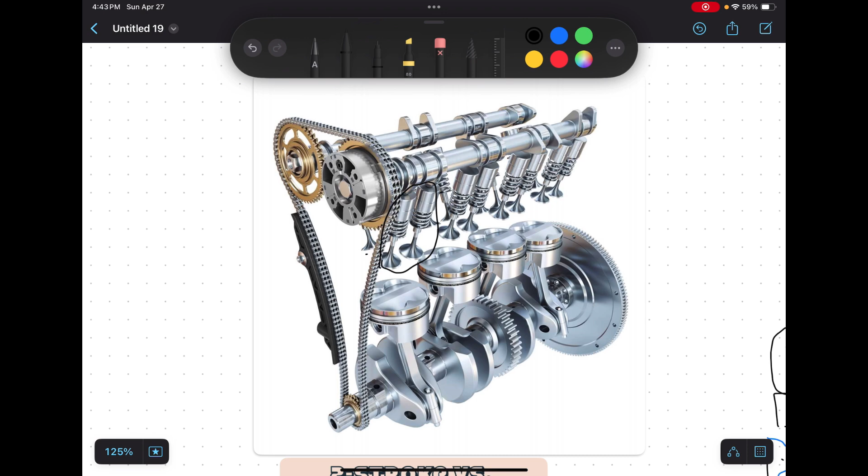So this is going to essentially be the diagram we're working off of. You've got your 4 pistons. You've got your valves. Each piston has 2 exhaust valves and 2 intake valves behind it. You can kind of see them, and you can see them better right there.

Those are the intake valves, and these are the exhaust valves.

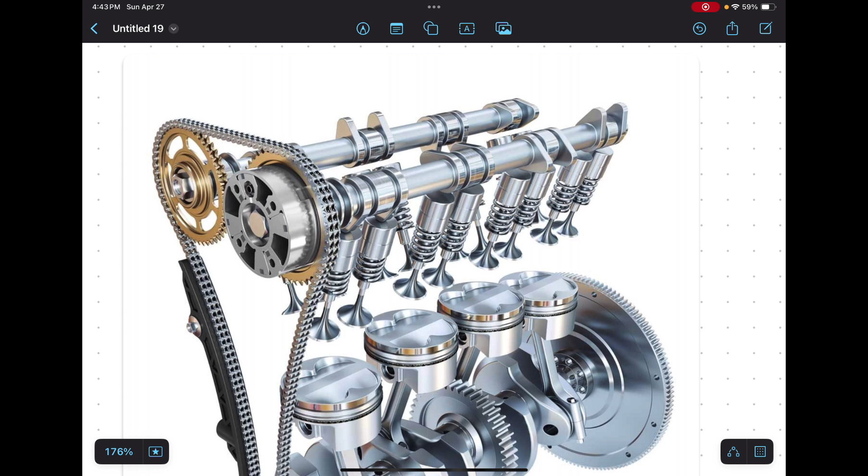Okay, cool. Well, what are camshafts? They're the things right above the valves, these 2 big shafts.

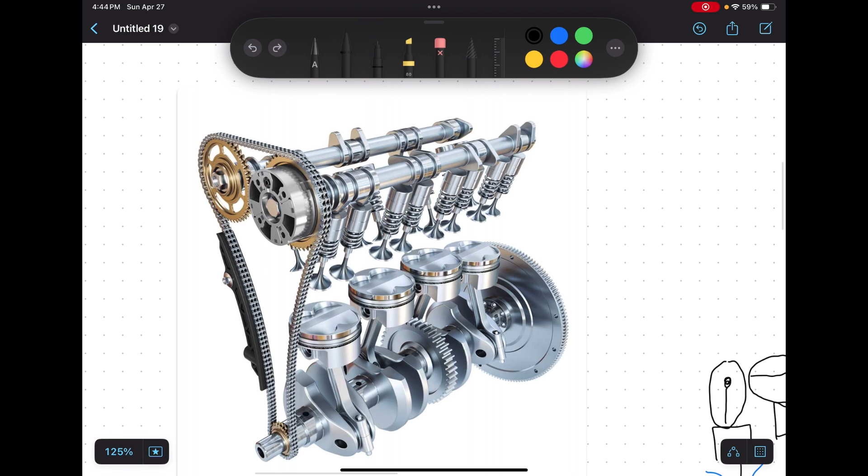So what do they do? Well, the first thing I'm going to talk about: you have your drive shaft down here. It's connected to this small gear, which is connected to these 2 big gears. If you have a small gear connected to a big gear, that means this shaft, the camshaft, is spinning slower than the drive shaft. To be precise, it spins at half the speed of the drive shaft.

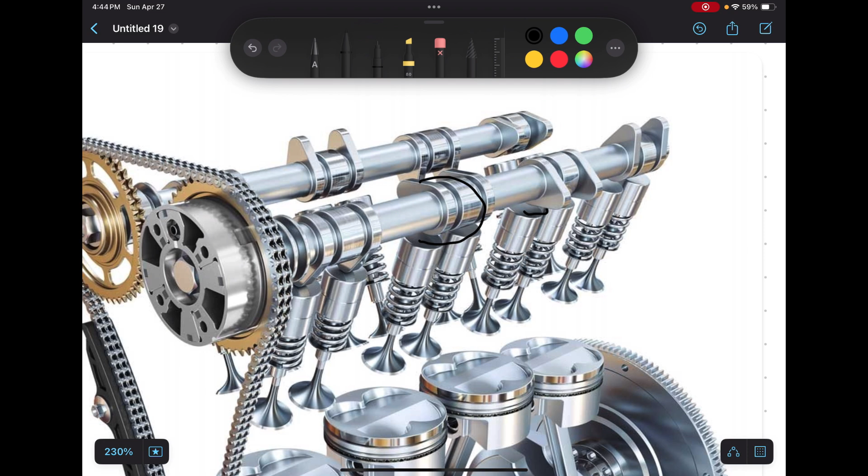Cool, next, what are these lobes? Well, as the camshaft spins, these lobes wrap all the way around and down and hit the top of these valves. And as they hit the valves, right here, they push them down and it opens it up.

And it'll look better on my next run. Okay, cool, I think that's all I want to talk about on this picture for now.

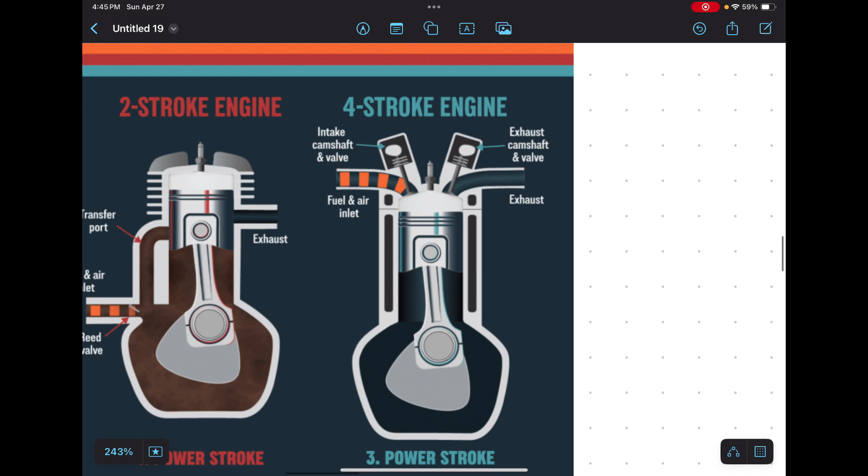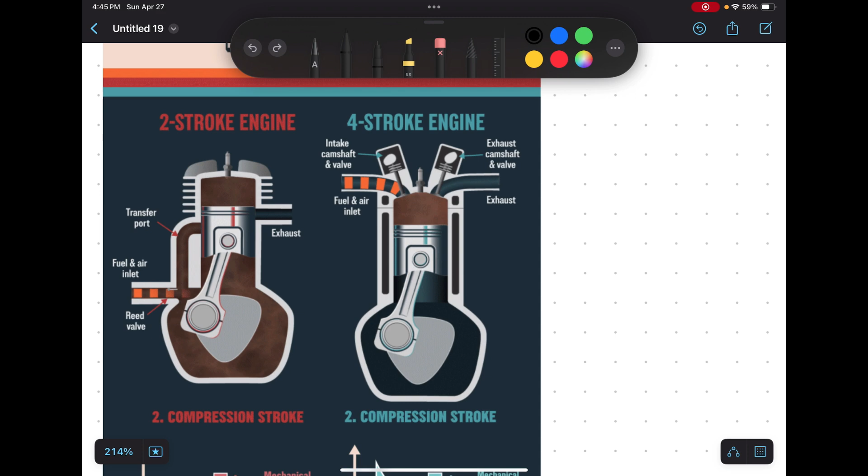So a visual demonstration of this is down here. It's this one, the 4-stroke engine. Don't pay attention to the 2-stroke engine. So you've got intake, compression, combustion, power stroke, exhaust, intake, compression, combustion, power stroke, exhaust.

Cool, so as you can see, for every 1 rotation this spins, the camshafts spin at half the rate.

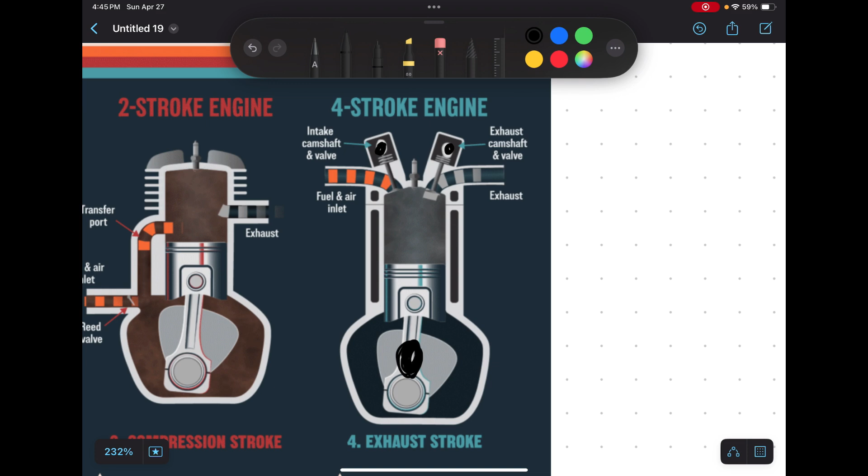Cool, so I've broken down all 4 states over here. So you have the intake, combustion, power stroke, and then the exhaust stroke.

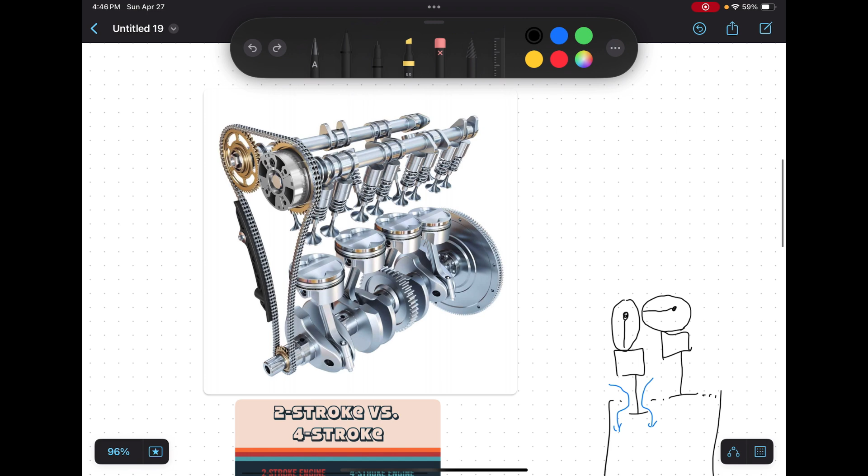Cool, so intake: this is your intake valve, this is your exhaust valve. So this is exactly what is up here. You've got your exhaust valve with your exhaust lobe and your intake valve back there with your intake lobe. Cool, so in your intake step...

The intake lobe is open, so it's pushing down on the valve, and your exhaust is to the side. And when it's to the side, it doesn't help - the valve's closed.

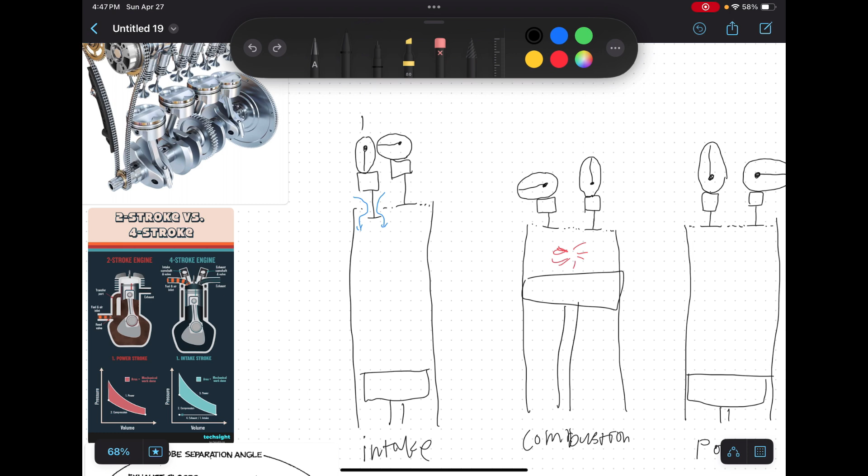Cool, then the intake valve closes and you move to the combustion stroke. And in the combustion stroke, both valves are closed.

And both of them have rotated clockwise by 90 degrees. And then in the power stroke, again, they're both closed, and both of them have rotated by 90 degrees.

Cool, and then the exhaust stroke, they rotate by 90 degrees again, and now the exhaust cam pushes down the exhaust valve, and that lets the exhaust air from the engine that just combusted to leave.

Now there is a problem, and that problem is, well, okay, this is the normal routine. All cars do this, your car does it. If it's stock, it basically does this.

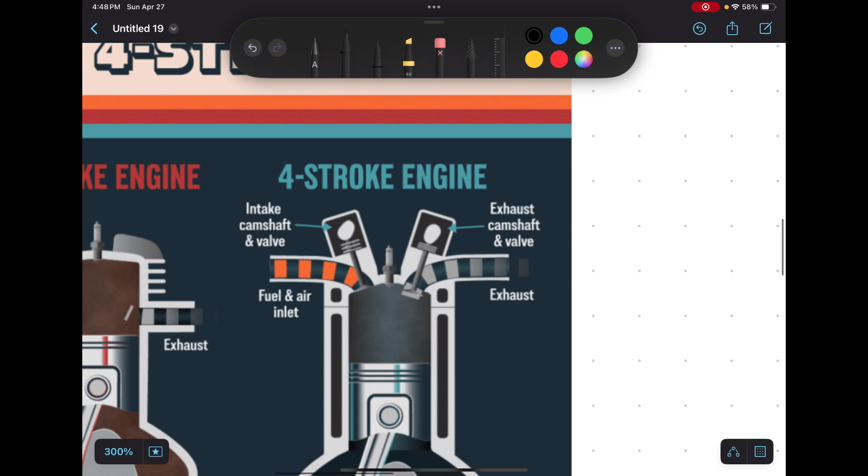Now there is a problem, and that problem is, let me get to it. All right, exhaust, bang, it stops right there. There is still that much combusted air stuck in the cylinder, and you don't want that. You want to remove all of the combusted air from the cylinder.

Why? Because combusted air can't combust again. Well, technically it can if your car runs lean, which technically like all cars do, but we're going to assume it runs stoichiometric, which means there is no leftover oxygen in the exhaust air.

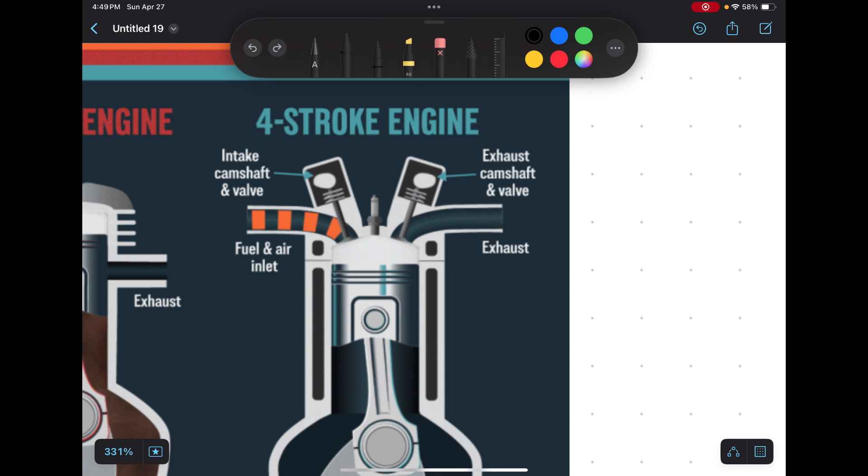Cool, so you want to remove all the exhaust air, but that isn't what's happening here. What's happening here is you're left with some exhaust air inside of the cylinder because it doesn't go up all the way. You're still left with that bit of room.

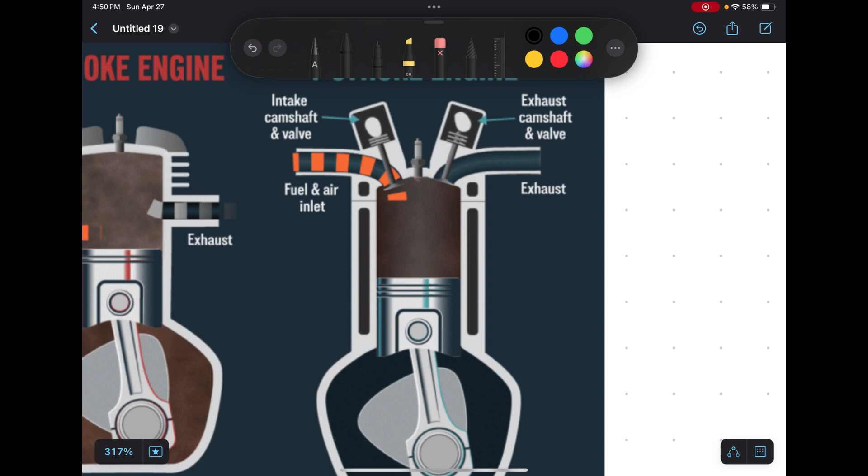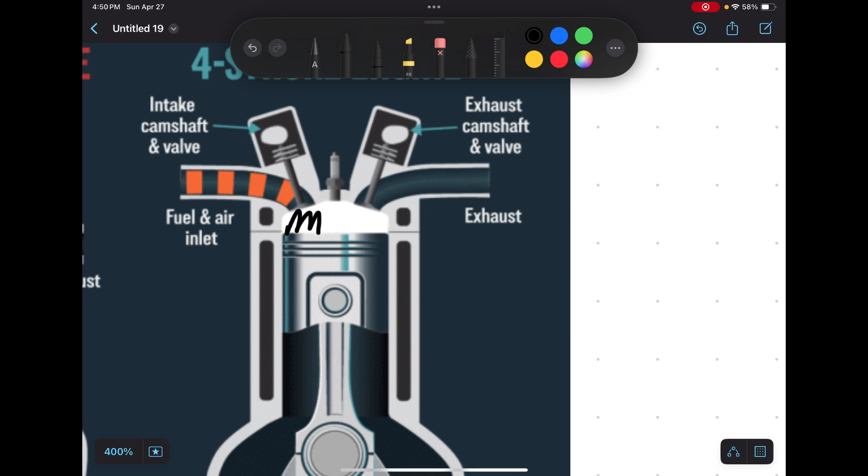Cool, so let's put some simple numbers to that. Let's say you have a compression ratio of 10, which means volume 1 equals 10 times volume 2. So you're at volume 1 on the intake, and then during combustion your piston goes all the way up to volume 2. But because volume 2 is not 0, it's some positive number, there's still some exhaust air in there.

So what is cam overlap and how does it help? There's a region where there's overlap, which means the exhaust valve is open while the intake is open. There's a bit of overlap. Why do you want that? Well, if there's a bit of overlap, that means both of the valves are open at the same time.

What's a good way to draw these? That's fine.

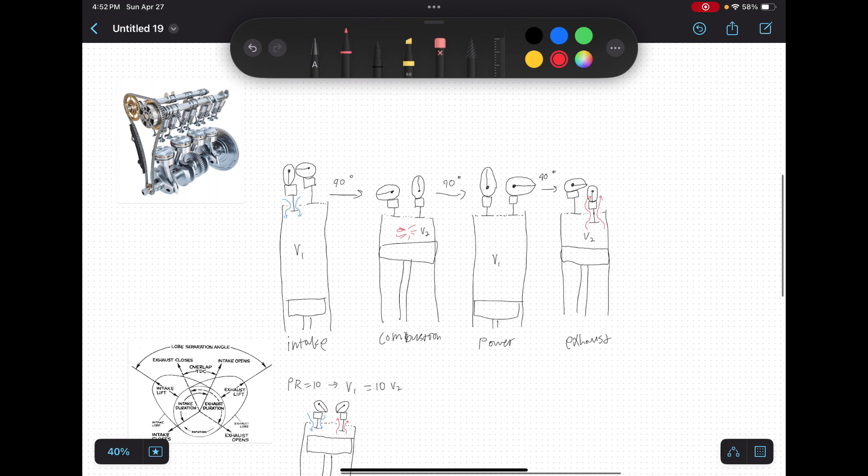And you've got new air coming in, and you've got exhausted air leaving at the same time. So basically, you're in between step 4 and going back to step 1, and there's a bit of overlap there. That means exhaust is leaving while fresh air is coming in. So what does that do? That basically completely purges all combusted air from inside the cylinder. It removes all of it, blows it out.

So that means instead of still having some exhausted air inside the cylinder, you have all completely new, fresh air. Now, you're never going to 100% purge the combustion area, because you just can never get to 100%. But you can get closer and closer by increasing the overlap between the valves. You can keep growing that angle and get more and more combusted air out of the cylinder.

Cool, what else does this diagram tell us? Well, as a side note, you can also increase the rate at which air enters or combusted air exits the cylinder based on how big these lobes are. If they're bigger, the valves come down more. You have to be careful if you install bigger camshafts, because if they're too big, you could push the valve down so far that when the piston goes up it hits the valve, breaks it, and breaks your whole engine. So you want to be really careful when installing bigger camshafts.

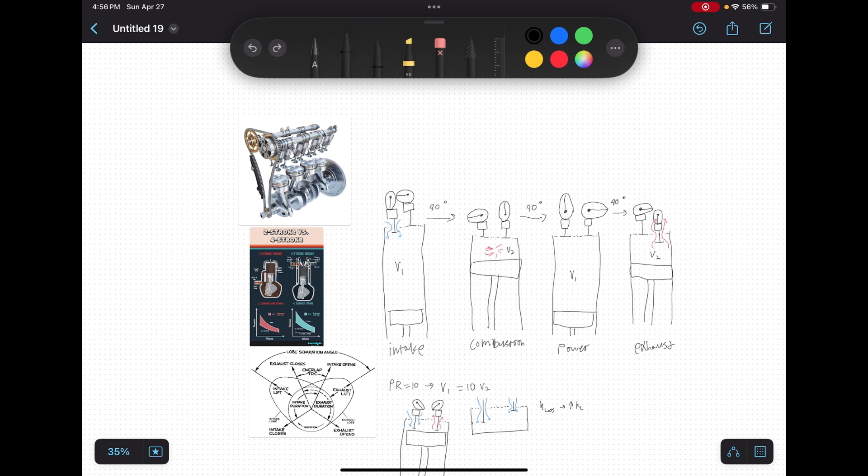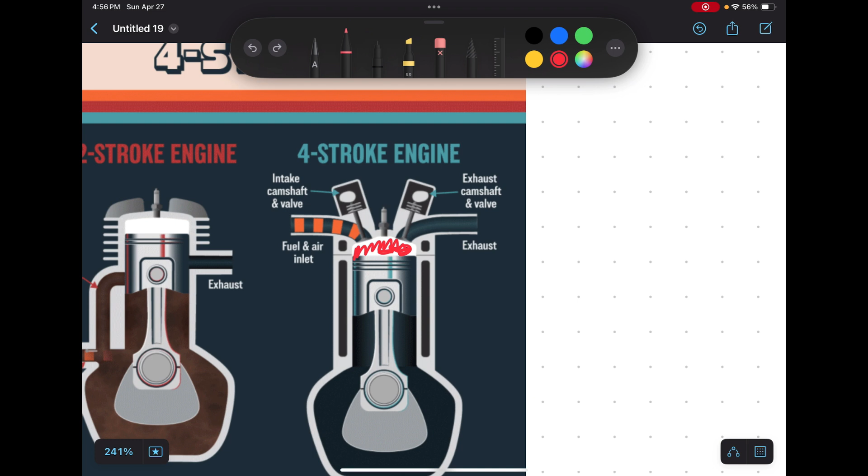So the big thing that cam overlap solves is the fact that you still have combusted air in the cylinder when it goes up and completes its exhaust stroke. And that stays there during the next combustion cycle. You don't want that, because combusted air ideally can't combust again.

To fix that, you add a bit of overlap, which means both valves are open partially simultaneously, so air can go in and go out. That means you can fully purge the piston before it goes back into its intake and combustion strokes.

Cool, let's do some easy math, continuing with a pressure ratio of 10. Before, if you don't have cam overlap, you'd have 90% new air and 10% exhaust, which means you can only combust 90%. So you're making 90% of your possible power. This is like every stock car making 90% of its possible power, or X percent based on the pressure ratio.